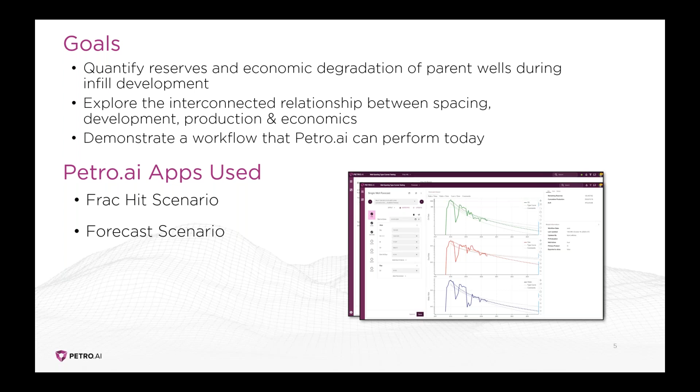And then we'll run a forecast scenario on a given well. With that forecast scenario, we can create a pre and post infill development decline curve. Based on those two different decline curves, we can run economics on both of them and look at the NPV and the production impacts of this frac hit.

We'll also spend a few minutes looking at Petro Earth. Petro Earth is our fully immersive 3D explorer where you can visualize all of your subsurface data in one location. Yeah, that's a piece that we're really excited to share, and that's new in the latest version of Petro.ai. We're really excited to hear folks' reactions to this new addition.

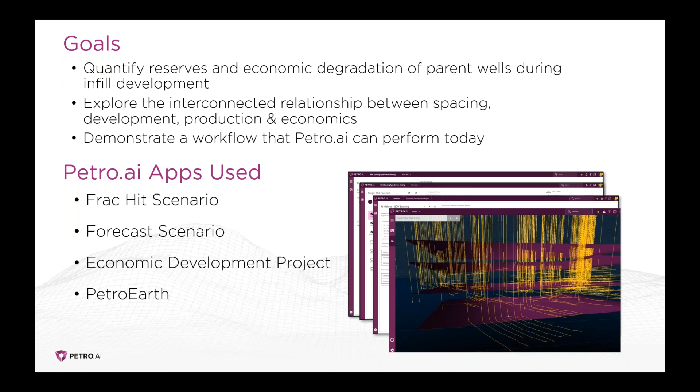And then the last piece that we'll add here is that this data was provided to us by TGS, which we're happy to share, and we're very proud of our partnership with TGS. But Petro.ai is data agnostic, so we can connect to other data sources as well. So we could connect to IHS or to drilling info or to internal systems and present that through a single view with Petro.ai.

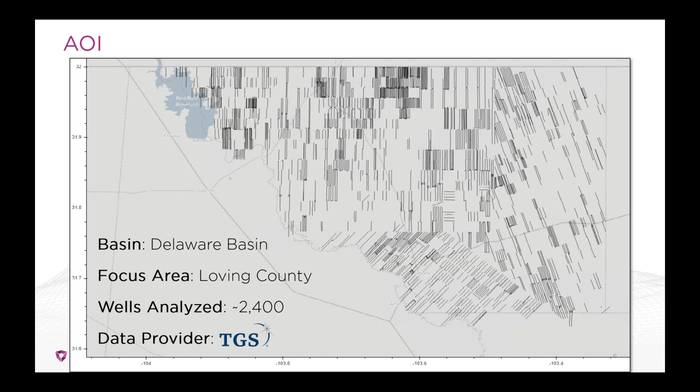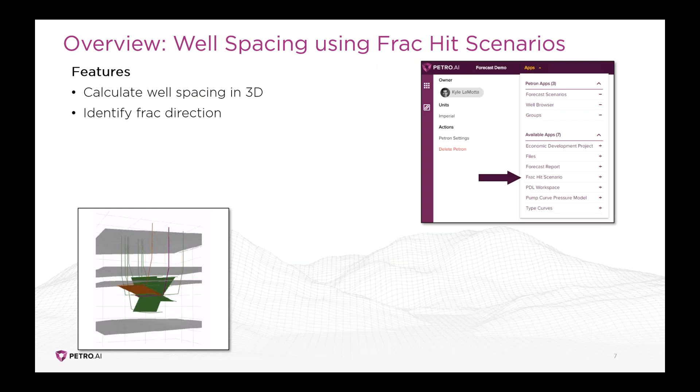So we'll spend a lot of time inside Petro.ai clicking around and showing this workflow, but just to point out some of the key features before we dive in, starting with the Frac Hit Scenario, this is the tool that we can use to calculate well spacing in 3 dimensions. So we calculate the vertical offsets, the horizontal offsets, and then the well-to-well distances.

We can also have input controls to define what we consider parent, child, and sibling relationships. So for a given well, you can see all of its child wells, all of its parent wells, and any wells that were completed within the same time period. And then you've got control over not only the parent-child classification, but also the spacing considerations for flagging those offset wells.

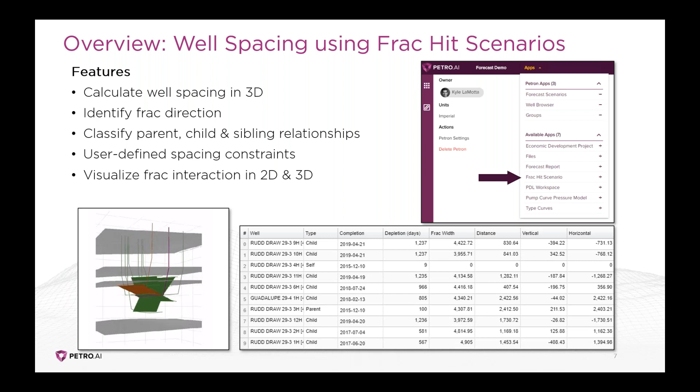And then you can interact with these wells in 2 dimensions, looking at different map views, gun barrel views, and also we've got a couple of different ways to visualize the wells in 3 dimensions. And then ultimately what we want to do is calculate the frac hit production response. So if you notice that there was a frac hit, you see a significant production response, being able to quantify the actual difference between the well's performance before and after.

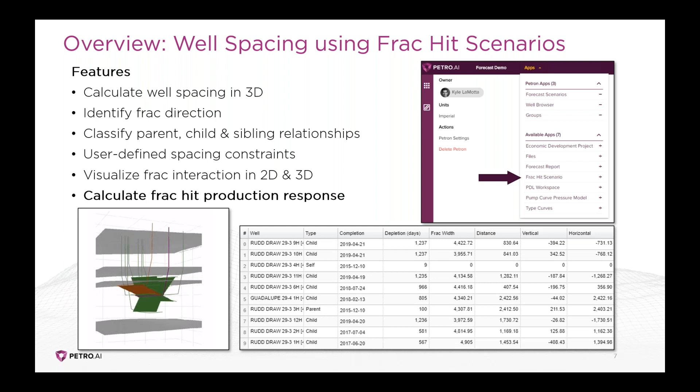So the data types required for this particular app, pretty straightforward. We've got well header, monthly production, and wellbore surveys. We've also incorporated a stress map, which has the location and orientation of SH max. That will be important for identifying the directions that the fracs are likely to propagate.

We can also enhance the analysis by bringing in horizon grids. If you have horizon grids, we'll automatically classify the landing zone for each well and tell you the percent in zone, so distance from top to bottom of the formations above and below it. And then you can really get into the pressure response if you bring in wellhead and bottom hole pressures for the offset wells, as well as the high frequency production rates.

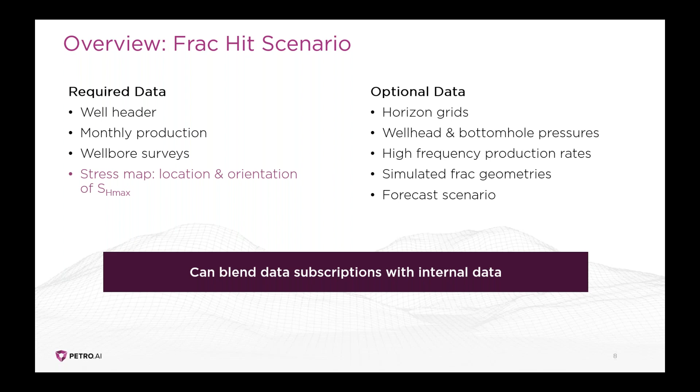And then the last piece that I'll share is on that stress map. If you have an internal stress map that you'd prefer to use rather than the default Lund Snee, Zoback map that we use, we're happy to incorporate an internal stress map as well. Yep, so we can blend the two together or we can use one or the other.

And so we think this is really important, that you're not getting parent-child classifications as a service, but rather a user can change the assumptions that went into building those classifications and then run different scenarios with different assumptions, increasing that vertical distance, decreasing the horizontal distance. We think that's really powerful functionality.

And then the other piece here is that for the horizontal frac propagation distance, we're not looking in a direction perpendicular to the wellbore, but rather we're looking in the direction of SH max, which would be the direction that fracs propagate. And that's another really important distinction.

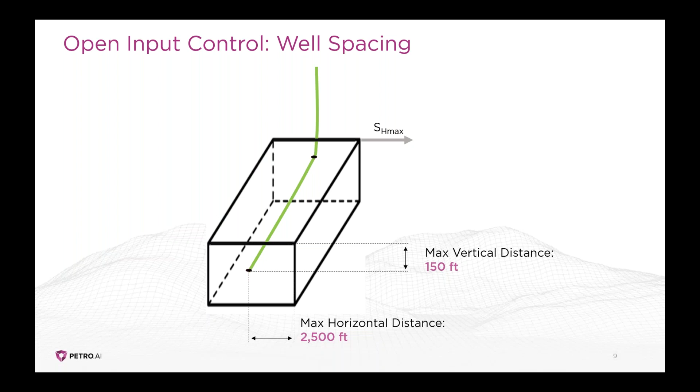So one of the other inputs that we consider is the horizontal overlap. If you think about two wells that might be parallel to one another, you're not always going to have the wells be the exact same length, or the wellhead locations might be slightly different, as in this example. And so in order to pick it up as an offset well, there's a horizontal overlap input.

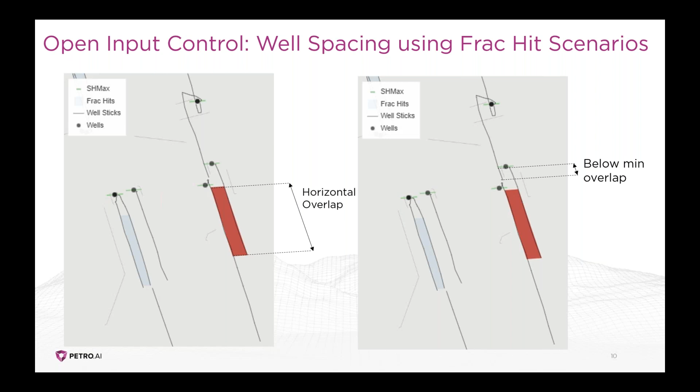So speaking of parent-child, if you think about the first production date for a given well, there's an input to control the sibling. So we call that Sibling Day Offset. And we use 90 days in this analysis, but you can shorten that or lengthen it. So any well that came online within 90 days of a given well is going to be considered a sibling. And then wells that came online before that will be parents. And then any well that came online after that is a child.

That's right. And when we're looking at the details of a given well, all of the calculations are going to be in context of the well that's selected. And so that'll make more sense when we look at some of these examples, but you're right. Wells might be a parent initially, and then later it's going to have children, and then those children might also become parents at some point in the future. So we keep track of all those different relationships.

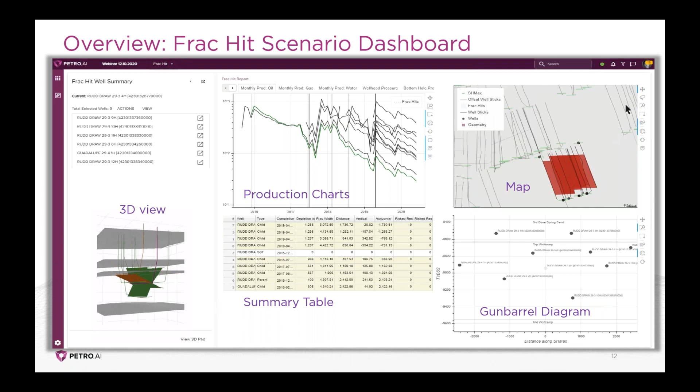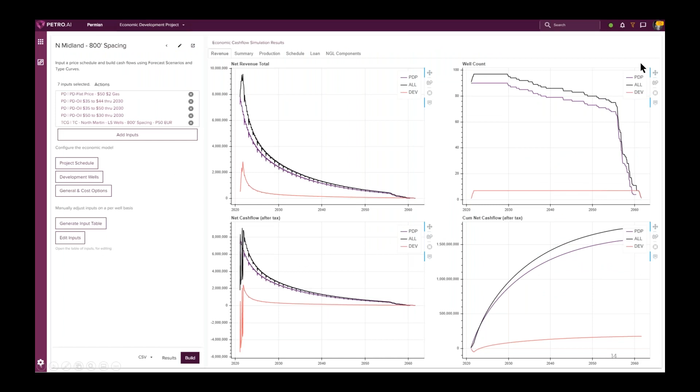And so this is really nice because it integrates directly with the other apps inside Petro.ai. So once you generate a PDP forecast or generate a type curve, you can quickly run economics on them. And the other piece that we think is important here is being able to bring in different price decks. Sometimes the world changes over the weekend if OPEC changes its posturing, for example. And so rather than rerunning a whole scenario, we can just bring in a different price deck.

So if I go back one, some of the visualizations inside the economic project are the inputs that you want to bring in. So that could be the PDP well forecast or the type curves, and then the price deck that you want to use. You can even model different price decks for different groups of wells. All of the inputs are controlled with these input buttons on the left side, and then we summarize the data in a variety of charts along these different tabs.

So you can look at the revenue over time. We'll split out PDP and development wells. You can see cash flows before and after tax, cum cash flows, and then the well counts. Then if you'd like, in the bottom left corner there, you can export to CSV and then export to the finance teams who are going to do all their work in Excel.

That's right. So building dashboards is very challenging because everyone, even within different groups at a given company, has different ways that they like to look at stuff. So we're never going to be able to make every single dashboard for every person, but we do want to make it very easy for you to get that data in a standardized format so you can integrate it into your Excel templates, your Spotfire projects, or Power BI.

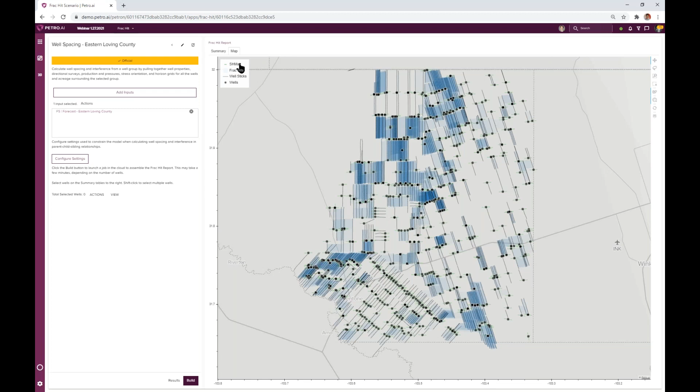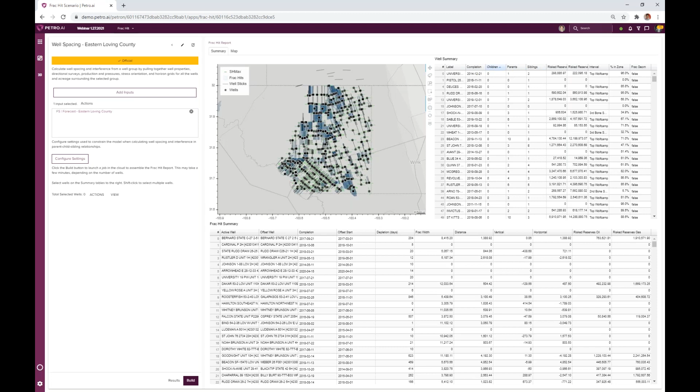And so these tables are really interactive. It's easy to sort them. I can select the well and see where it's located on the map. So as I'm clicking around, you can see these wells being highlighted.

So what we wanted to do is find wells that have children but don't have any parent wells themselves. So for example, this well here, it's got 13 children. It doesn't have any parent wells. So we know that when it was drilled, it was originally drilled unbounded because this well doesn't have a parent itself.

Another way that we could think about this is if we were looking for child wells, maybe we want to sort the parents column, and we can see that this well's got 17 parents, this one's got 12 parents. So we know that these wells that don't have any children, but do have parents, that this would be a child well.

Some other things that we classify is the interval that it's landing in. We can see that these are in the top Wolfcamp. We've got some third Bone Spring. So based on the horizon grids that were input, we're gonna classify the zone that each wellbore is landing in, and then a relative percentage in that zone. So relative placement from bottom to top.

And again, so this is with data subscription data. So these formation grids aren't as granular as you would have access to internally, but Petro.ai does a good job of classifying even with this lower resolution data set.

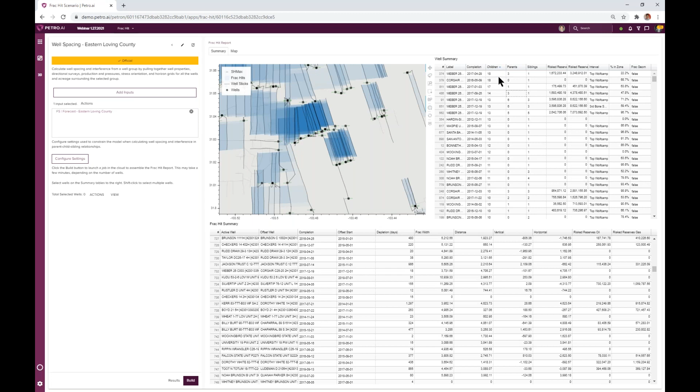So what we wanted to focus on was finding a parent well and then looking at the impact of the child well infill development. And so this well right here, this Rudd Draw well, is pretty interesting because it's been producing for about 6 or 7 years. It was drilled in 2015 and later had 11 children wells drilled off to the west. And it's also unbounded on one side.

So we can see, does the impact of these wells to the west have any production impact? It's also interesting because it's near some of these other leases that look like they've just been held by production. You can see, solo wellbore here. So lots of open acreage to the east.

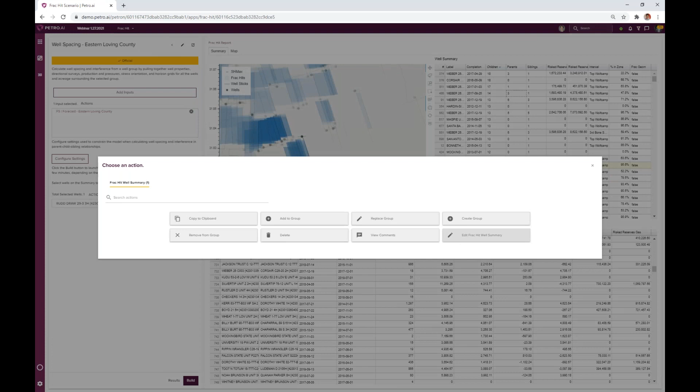And so once we select this well, we can edit the details, or we can view the summary by launching an action. And that's part of the connected analytics, being able to select a well and then launch an action to do something else with it. So what we're loading up here is that well that we selected, which is the Rudd Draw 3H. And it's also going to bring in the offset wells nearby. So for those 11 children wells, it's going to pull those into this dashboard, and we can see our Rudd Draw 3H.

And then its offset children in the table. We can see that all of these are labeled as child. And then the distances between the wells. So earlier when I mentioned on this summary page, all of the calculations are relative to the active well. This table is showing that exact thing, where this is the well that was selected, but all of these other child wells have a relationship with this 3H well, and we can see the relationship and the distances between those wells.

So I might want to find where are the wells that are most near vertically, or which ones are closest horizontally. You can use the table sorting to find those, or you can look at the gun barrel and see, okay, right here on the east side of this pad, here's our parent well. And then to the west, we can select these and see that they've been infilled over the last couple of years.

So while we're on this page, Kyle, do you want to look at the 3D view next, or do you want to talk through the production performance of that parent? Yeah, let's look at the 3D. So on the left side, we've got the parent well, which is the purple well here. And we can see the horizon grids, or the formations around the well. And then we can see the wellbore surveys for these 11 child wells.

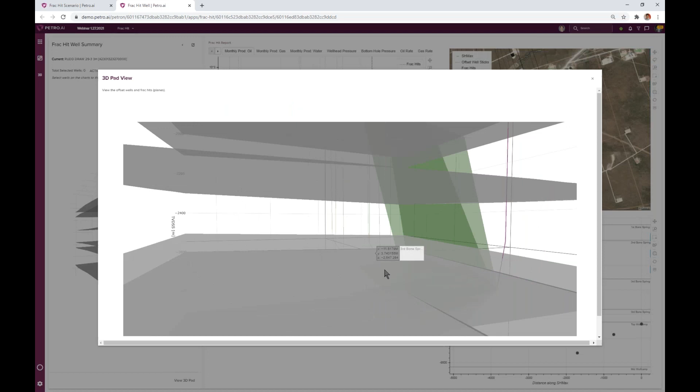So I can make this a little bit bigger, and we can really interact with it in 3 dimensions. And so we can see that with these planes, this is the likely planes of interaction between wells, again, based on those input controls. So if you don't want it to flag a well that's 2 or 3 zones away, we could have really tightened up that vertical offset, and then these wells wouldn't have been considered offsets.

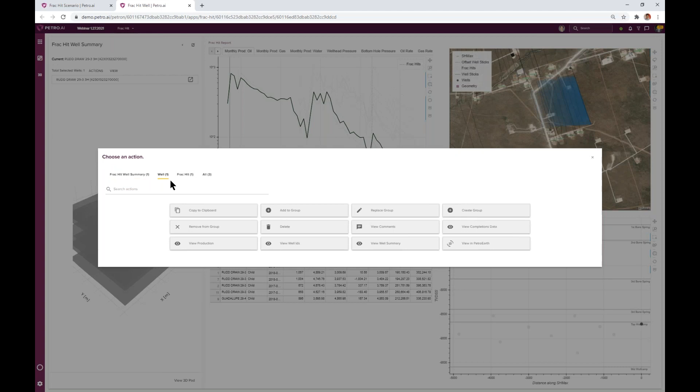Another way that we can visualize this in 3D is by selecting it. This well now becomes my active selection. And we can, again, launch an action. This is part of the connected analytics. And then for that different data type, I can select the well and then view the well in PetroEarth. So that launches a new browser tab, and it's going to open up the PetroEarth app.

And this is where we can really interact with this data in a really rich way in 3 dimensions. So you can see all of this stuff is loading live. It's all browser based. It's all very performant. And you don't have to have any special hardware on your machine to run it. All right, so here's our Rudd Draw 3H. That's the parent well that we were just looking at.

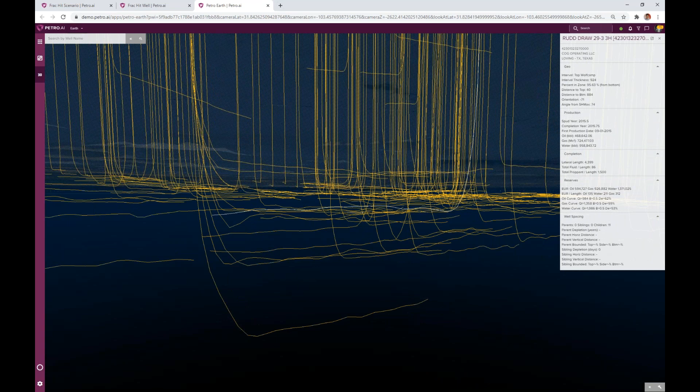And I can zoom around and see that this well is off to the east. There's really no development around it, but then over here to the west, this is where we've got our infill child development wells. Yeah, that's a helpful view there, Kyle. Yep, so we can manipulate the camera. We can look top down. I can spin it around and use kind of the gun barrel view.

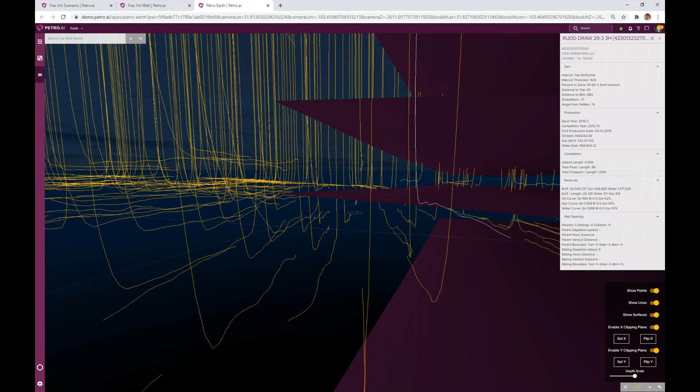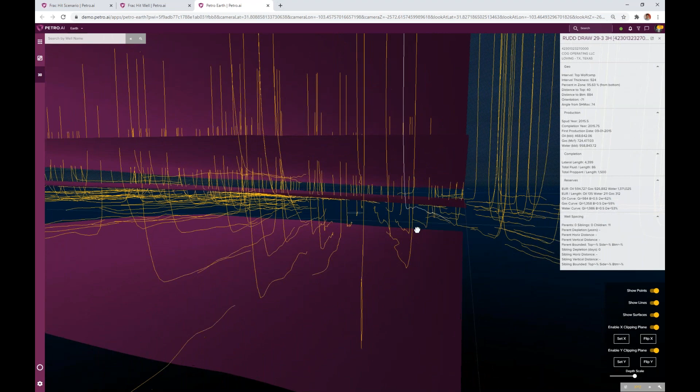And then we can also layer on our formation planes. If we wanted to see the surfaces, we can define where we're slicing these grids. So maybe we want to cut some of the, let's flip this around. So maybe we want to cut our planes here and here. And now we can see these formation grids along with the well bores. That's fantastic.

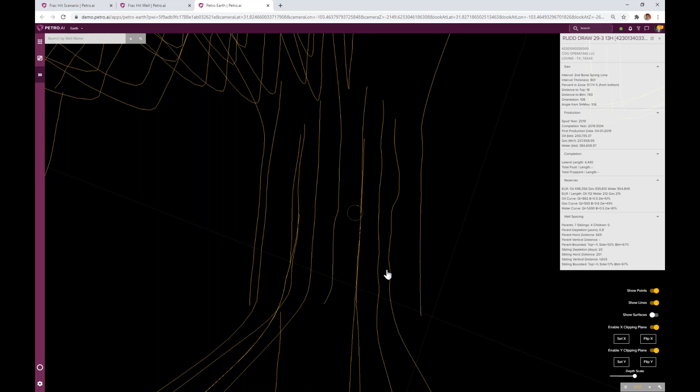And so another piece that I really like here is that most of the time when people think about data browsing and well browsing, they imagine folder trees and structures and things like that. But our view is that those sort of folder structures just lend themselves to the siloed data problem, where you have different data types stored in different folders. We think it's much more intuitive to select an individual well or select a group of wells, a pad, and then launch different actions depending on, contextually, whether you've selected a single well or a group.

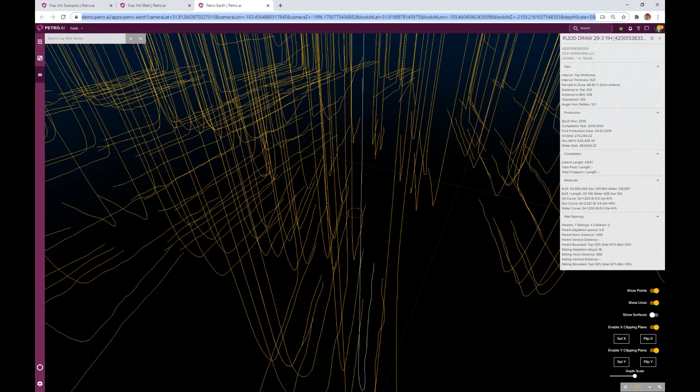So from here, you can see on the right-hand side, different statistics about the well spacing, about the production history of that well, and so on. So we selected one of those. Go ahead, Richard. And so I was also going to mention, if you wanted to share this view with me, that's easy to do in this era of remote work. It's as easy as copying and pasting that URL, dropping that into Teams or Slack or Outlook or something. And then when I click on that same link, I'm presented with this exact view of the same data that Kyle's looking at.

Yep, that's right. So all of the links are unique to the page that you're on. You can see that there's lots of IDs in here, so it's very easy to share these things. And another way that we could also share this with each other, if I go back to our summary page, I could copy the link and send it to Richard. I've also noticed that he is inside this analysis with me. So on the top toolbar, kind of like when you're collaborating in Word, you can see other people that are working in that document. So we show you who's working inside this workspace with you.

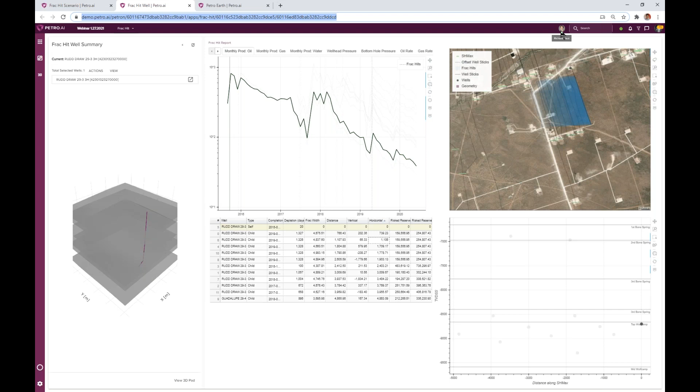And I could make a comment and say Richard, oops, not Jared,

Yeah, looks like this well was hit pretty hard. And then he would get a notification in the top right corner, and he could see that I was working on a frac hit analysis, and then he can join me directly on this page, and we can interact socially inside the context of this workflow, which is really helpful when you come back in a month or 2 months. You've got the history of what you were thinking about, what you were working on, and who is collaborating with you.

And so I can reply back to that. So that's populated now on my machine here, which I know you guys can't see. So I'll just type a comment back.

Okay, and that should pop into your machine. Yeah, so I can see that negative frac hit.

So you also tagged it, and anytime you tag something, it saves the page you tagged it on. So you can search for it in the top toolbar using this hashtag neg frac hit. For example, if we were doing a broader project and classifying these different interference pairs as positive frac hits or negative frac hits, hashtags are a natural way to classify things through these comments.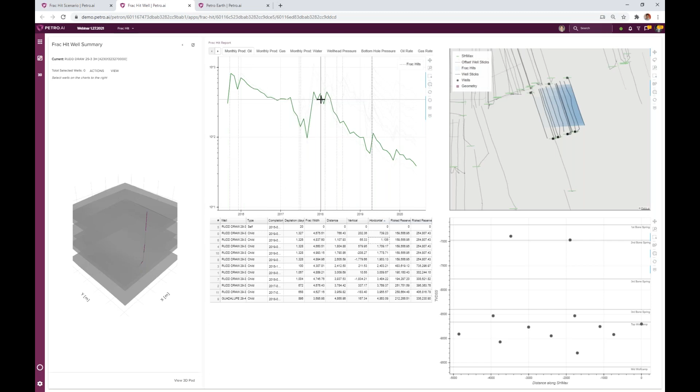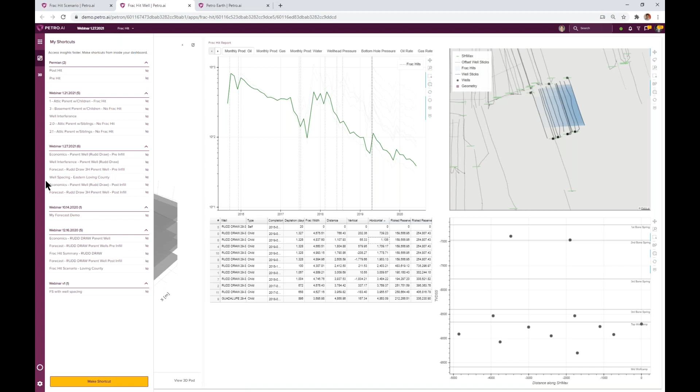So I've saved a link over to our forecast for that well. I can look at - here's our forecast, Rudd Draw 3H parent well post-infill. We've actually incorporated both decline curves into this one page, and that links us to our forecast page where we've gone ahead and fit a decline curve before that frac hit, which is what you can see with this black line.

So if I put my cursor there, you can see this is the parent well pre-infill decline curve. And then we've also updated this post-infill and fit a decline curve through that more recent production section.

So when we're thinking about sort of the price of this frac hit, and quantifying that economic impact, we're thinking about the area between these two curves, and then thinking about the forecast price decks, discounting that back to a dollar value today.

Yep, that's right. So it's really the area between the curves, and then applying some cost assumptions and price assumptions to figure out what that value is.

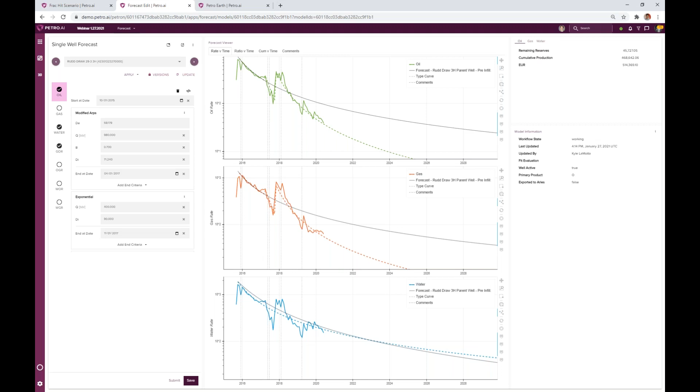So all these different apps are available through the dropdown, so you can get a sense of what's in there. We could go straight to the economic development project, or we could launch some actions to connect these things together - I could launch an action on this forecast scenario to run an economic development project.

But just to save a few clicks, I've put in these hyperlinks, and we can look at the economics of the parent well pre-infill - that's the black decline curve here.

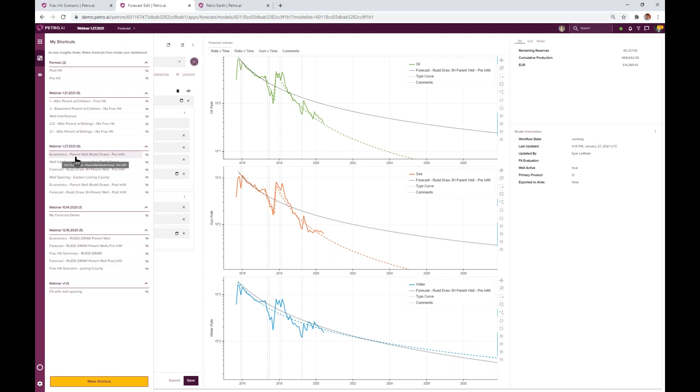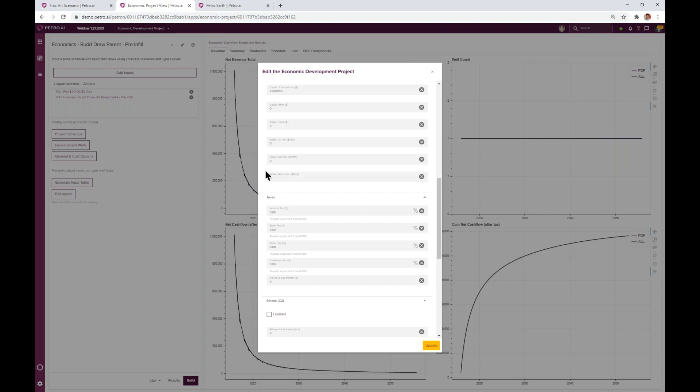We've also simplified the cost options here, so 100% working interest, 100% revenue interest, and haven't considered any taxes or CapEx for drilling. So basically we're just applying the production, multiplying that times the commodity price to get a relative comparison pre and post frac hit.

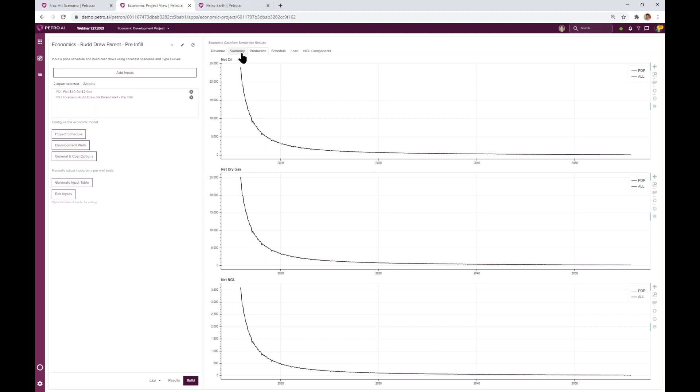Okay, so if we look at the production profile, here's our decline curve that's pretty smooth. We don't have any change in the shape of it. And if we look at the summary, I can zoom in here and look at if we were to drill this well, not considering any sort of drilling cost, obviously, we would have an NPV of $19 million.

I think I went too far in.

And then if we go over to our schedule, we can see when this well started, and then from this start date into the future, we've got reserves of oil of about 700,000 barrels. So that's what it would have produced if it didn't have this frac hit and if it followed our decline curve trend. And that's likely the reserves that have been booked before this infill development.

Yep, that's right, so again about 700,000. And then if we go to the summary, we can see the NPV is about 19 million. So some of these other things are empty because we didn't model any sort of CapEx, so there's no rate of return, no return on investment, and we didn't model any sort of loan with equity or anything like that.

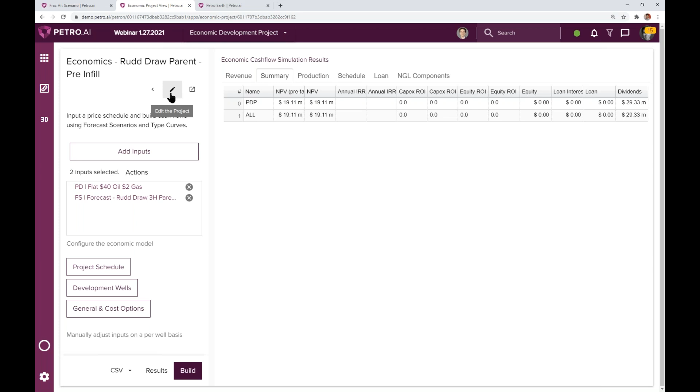Okay, so the other economic project that we built was post infill development. So if we think back to our type curve, we were still considering the production history, but then that infill development caused the change in decline curve. So I've put a link in for that one as well. So we've got our pre-infill, which is what we just looked at, and then our economics post-infill.

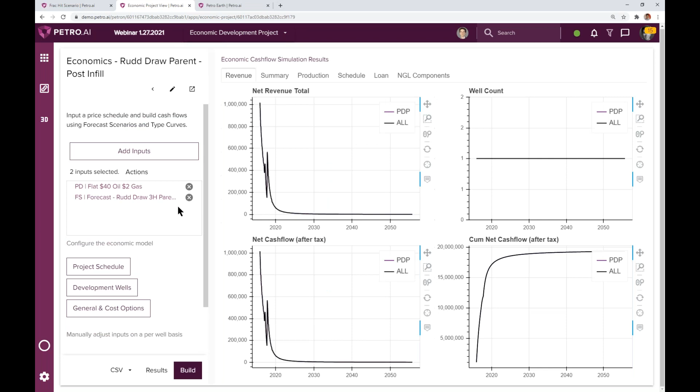And so it's a different scenario. We could have just swapped out the inputs and rerun it, but we've got our forecast scenario 3H, zoom out just to see that, post infill. So this is our forecast after that frac hit.

And if we look at the revenue, this is indicative of our production profile. So we had one decline curve, we saw that uptick, but then we've got a change in decline curve after the frac hit, which we can see on the production profiles as well.

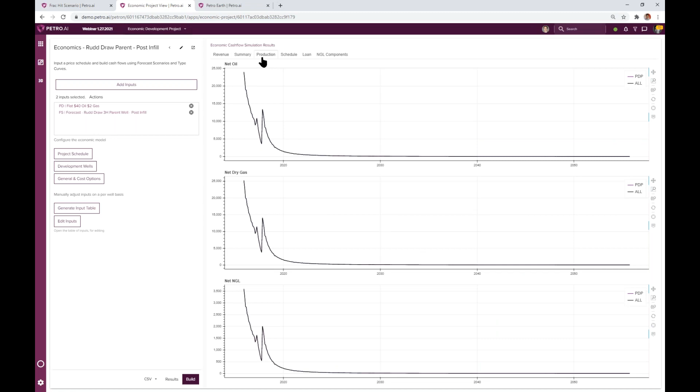So what we really want to know is, if we're looking at the NPV, how does it change? So if we consider the well before, it was about 19 million. After this frac hit, with our new decline curve, we're down to about 16 million of NPV.

And then if we click over to the schedule, we can see we're still starting at the same date, but the reserves have dropped down to about 450,000.

Yeah, so in this case, when we're budgeting for future infill development wells, we would want to layer in an additional cost, potentially, if we think we're looking at an analog of the geology, it may be appropriate to price in an additional $3 million of cost while budgeting that infill development project.

Yeah, so this is an interesting example, but it's certainly not the only one. We can explore different examples, but a different one that we found pretty interesting was thinking about the order of development. So we flagged one, this is in the Midland Basin, where we've got an attic well at the top of the zone, and later had infill development below. So thinking about the vertical interference, not only the horizontal interference.

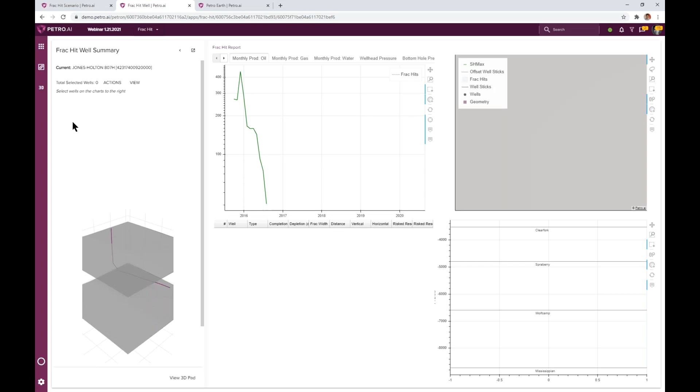And so I just want to pull this one up to show that Rudd Draw pad is certainly not an isolated use case, but we could use these tools and this workflow to find other examples where you've got a parent well with lots of infill development around it, and where we see a significant decline in production.

Yeah, so this one's interesting. As I mentioned earlier, I get confused thinking about parent and children and offset, who's offset where, and thinking about that in two dimensions is one thing, getting the nomenclature right. But then when you add this third dimension, it gets even more confusing. And so I like using this term attic basement parent-child pairs.

And so in this case, help me make sure I don't have this reversed, Kyle. Yeah, so this is an attic parent with basement children, coming in underneath. Yep, that's right, and a pretty classic wine rack development too.

And then even if we were going to look at that group of wells, Kyle, the group of infill child wells that fall off kind of as a group, do these share anything in common?

So let's select these. I think these were the ones that were at the bottom of the stack. No, the better ones were at the bottom. So these were kind of like this middle layer.

Interesting that there's this sort of interference called a sandwich interference, this middle zone, once we're thinking about this in 3D space, what these interference patterns really look like. It's not obvious just from map views, and it's not obvious just from the timing, but this is something we need to classify vertically from the map, in 3D space, and in time. There's a lot of connected analytics to do in order to see this pattern emerge.

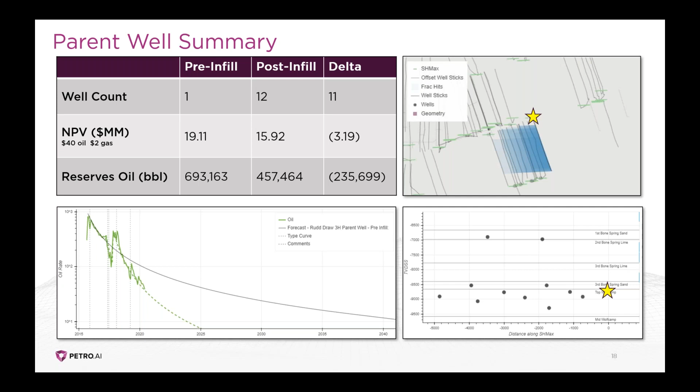And this is another piece that we're really excited about, for this SPE Permian Basin Data Analytics Group, you may have seen an email granting this group early access. But one thing that has really changed over the last 5-10 years is the way people interact with software and the way they make purchasing decisions. And so if you think about Dropbox or even Zoom at the beginning of the pandemic, Zoom had a free tool that you used, and that's how you sort of got acclimated with Zoom before you made an enterprise purchase.

This is really the way people like de-risking investments now and de-risking the way they do their work. So we want to adopt that same view with Petro.ai. We want to give potential users a chance to bring Petro.ai into their own environment, into their own workflows for free. So what we're delivering is a 1 gigabyte environment to anybody who'd like to participate. We will create user profiles, we can give you example TGS data, or if you'd like to deliver some internal data to our team, we're happy to ingest that. But then we create a sandbox for your company where you can use some of this connected analytics functionality in your own environment. And from there, if you'd like to load more data into the system, then we can grow with you. So this is something we're really excited about in 2021.

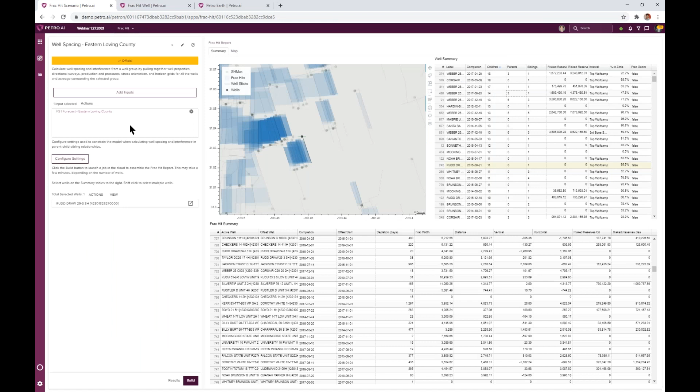The gun barrel, let's see, it would pick up the wells that are offset, but there's not a way to filter those on completion date. So you could change the well group that was in the analysis. If I go back to our initial scenario, we used this Eastern Loving County group, but you could say Eastern Loving County wells completed prior to 2018. So that could be the basis, and then this would show the filtered view based on that completion date. Okay, got it. Thanks.

Another thing that you could do, so I work a lot in Spotfire for prototyping and diving deeper into the analysis. And so we've got a way to export this directly into Spotfire, and then you've got a lot of controls over the filters and different charts that you can make. Awesome, great. How is that brought into Spotfire? Is that similar to the add-ons when y'all were formerly called Ruths.ai, kind of a Spotfire add-on?

No, there's no additional software. It's just an API call. So we've got a Python script that runs and grabs the data from the database. So you really just need a couple of ID tokens that grant you authorization to access the data, and then some of these IDs for the workspace that you're in, and then the Frac Hit Scenario ID. And so you can just input those into input boxes, and then it'll run a Python script to grab the data.

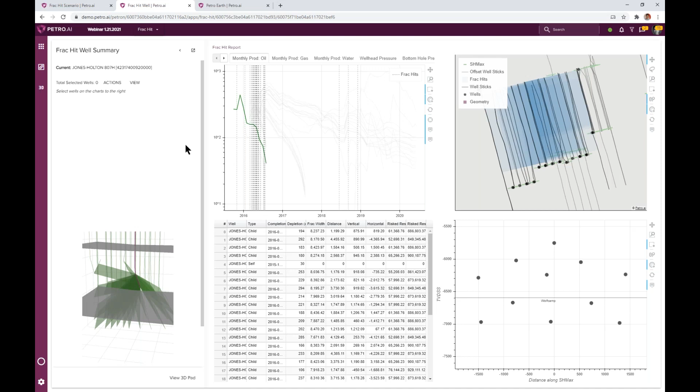And then another thing that we're releasing in the next version, in a week or two, you'll see a button down here that says CSV export. And so there'll be 2 tables that we're exporting, a CSV with a well summary and then a CSV with these well pair summaries. Great. Thanks for answering that.

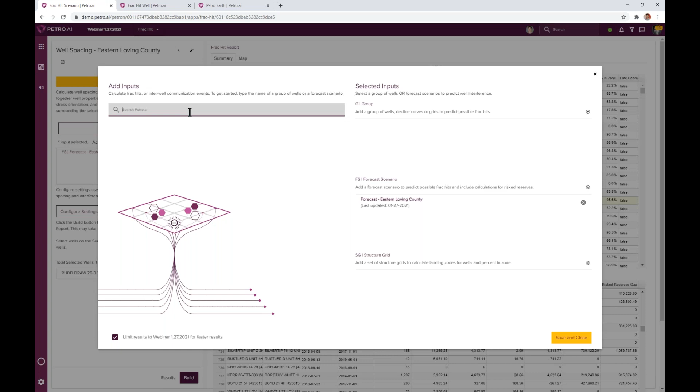Yeah, so if you were to start fresh, you wouldn't see this input group and you would see these charts be blank. And so you would just go in and add an input. So if I wanted to, let's start with a group of wells. Let's say that I find some wells that I think are interesting and I want to forecast them. So I can select them, and then I can see that I've got 10 wells selected over here. And so I can launch an action on those wells, create a group, and create this group.

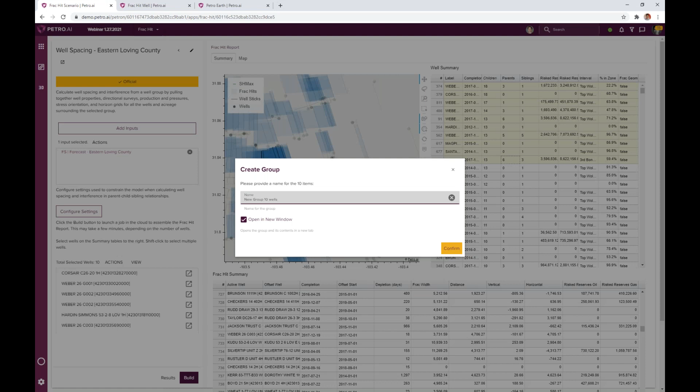So I'll call it new group 10 wells. So these are the 10 wells that I'm interested in. And then once you've got the group, you can do lots of different things with the group. So maybe I want to create a forecast scenario. I can do that by using an action on the group. I could create a forecast report. I could create a type curve. I could view the production. We can see them in Petro Earth. So there's lots of different things.

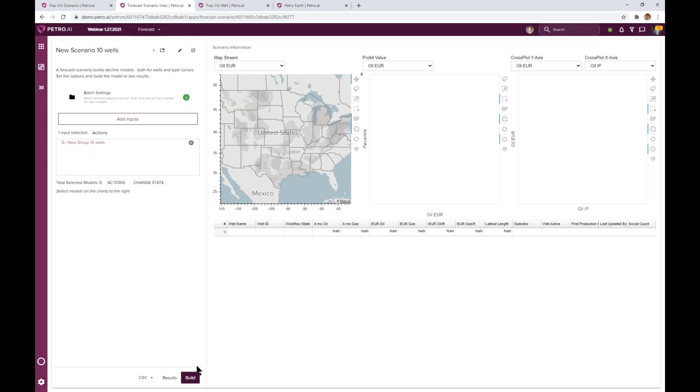So if I wanted to just create a new forecast scenario, I can launch the action. Hopefully you give them better names than I do, but just to click through it pretty quickly. So in 2 clicks, you can make the group, and then from the group, you can build this forecast. So the workflows are totally customizable. The apps are interconnected based on the inputs that you're using. So we've got the input group for 10 wells. We can see the forecast building in the background. And then if I want to go edit these, I can select the wells and then launch an action. Again, the actions connect the different workflows together, and look at those decline curve models.

Yeah, Kyle's probably the fastest gun in the West clicking through that. But what Petro.ai was doing in the background was auto forecasting each individual well, coming up with statistics about the EUR, displaying statistics about that well group. And now we've clicked into one of those 10 wells, so if we decided that the auto forecast engine needed tweaking, this is where you could inspect and make sure that this individual forecast is sensible.

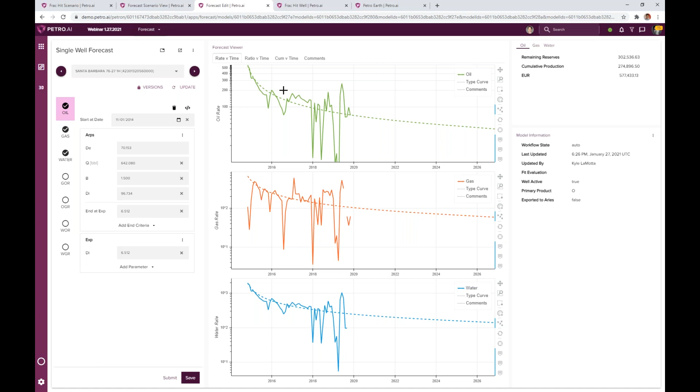All right, awesome. And then about the forecasting, do you use allocated or well tested, or can you toggle between that? It's whatever you specify. So the forecast runs on monthly production. So whatever you provide for monthly production, whether it's allocated by one of your data providers or internally. Awesome, that's very cool.

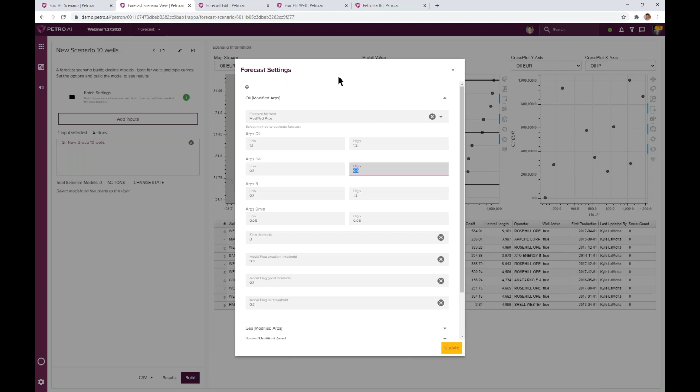Yeah, and we think something like this would be convenient for A&D groups, for example. Could you look at the forecast bookends, Kyle? So if your team had a house view of what the B factor should be and what the decline rate should be, you can set up the rules for what the auto forecast should look like that align with your internal view rather than just using the ones that the investment bank gives you in the presentation. And so once you apply your own internal metrics on this, Petro.ai will fit these new decline curves according to the parameters that you've set up.

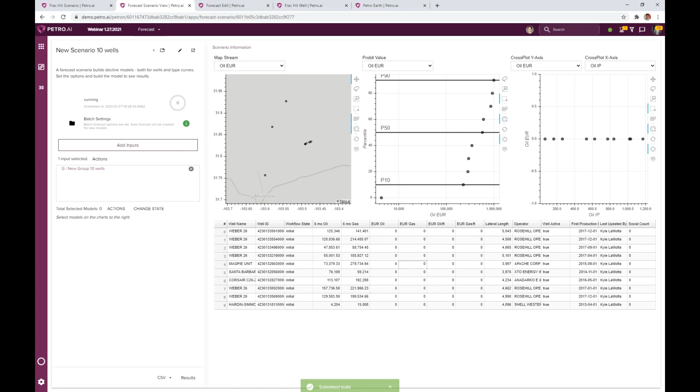All right, awesome. Then we save that as a different scenario. So it could be a bull case and a bear case, that kind of thing. And so here we've just kicked off another one with these new parameters.

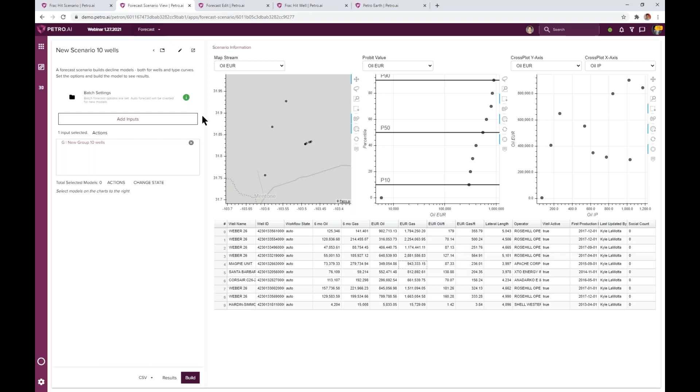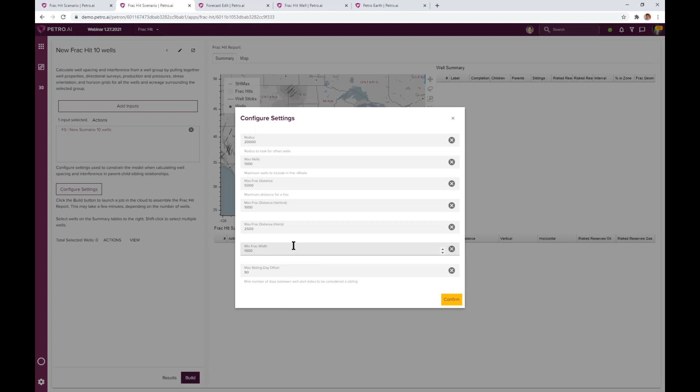Yeah, the same thing would apply if we wanted to do a frac hit. So now that we've generated this forecast scenario, maybe for these wells we wanted to look at the well spacing. So we could launch an action to look at this frac hit scenario. And I'll keep my clever naming convention of 10 wells. And so that's going to take us to a new app. So now we're in the well spacing app that we demonstrated today. We could put in our settings for the spacing constraints and all of that, and then build a scenario here. So again, that's kicking off a job. This is running on our Petro.ai cloud server, and it's going to run all the calculations, and then you can visualize the results.

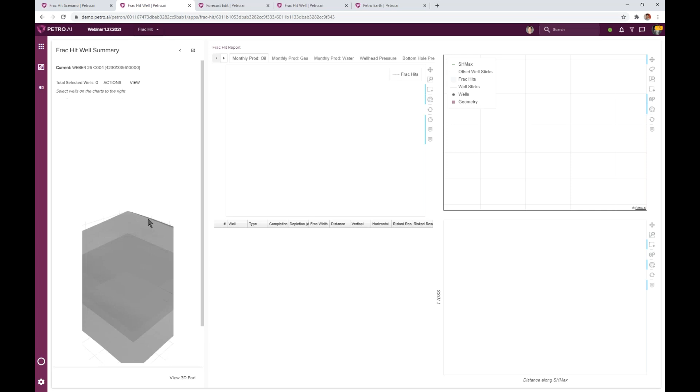Yeah, so this is pretty impressive that we were able to do this on the fly, pick 10 random wells, and we're really proud of this functionality. To your question, Anthony, when you have a new workflow or new inputs or a new scenario we want to run, how quickly can I do that? You don't have to go herd the cats and get different people to do new exports or move things from Spotfire into a different tool or get a new Aries export or something. Here it's all connected in one spot. That's pretty awesome.

And then I guess no one else has a question.

So you said it's connected data. So say if we want you to be more proactive with these frac hits, can you set up something where if you see something weird, like water rates jump, or there's an offset frac nearby, or a pressure spike, can you set up alerts using your platform? If we hooked you up to all the SCADA and all that stuff, would you be able to do some proactive alert emails, saying, hey, there's something going on here? Or is this more reactive, after the fact? I don't know if that makes any sense or not.

Yeah, so that makes sense. There's not an alerting feature where you can set a criteria and flag alerts. But some of our clients have automated those workflows by using the API. So all the buttons I'm clicking can be automated through a script just by making API calls. So some things we've done in the past to take some of the manual clicks out of it is writing

these scripts. Let's say you've got a Python script that's running every day to quantify well spacing and frac hits. That's where you could build in that logic within Python: okay, we're looking at our production profile. If there's a spike in pressure that exceeds this value for this period of time, send me an email. So inside Petro.ai, there's not a method for setting up those alerts today, but you've got access to all of the data and can build that logic in other applications and get those alerts. Okay, awesome.